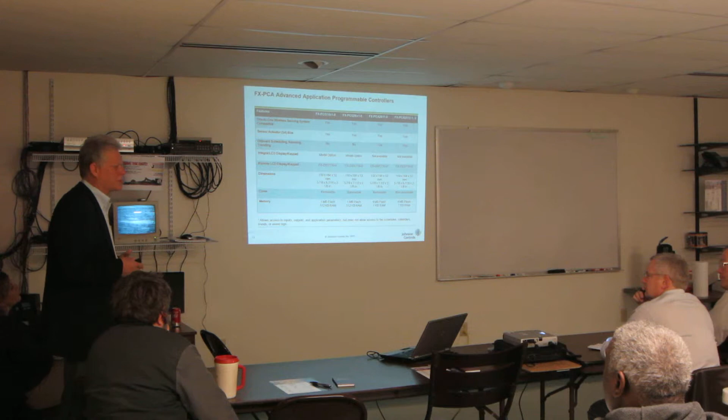The biggest thing probably too is this memory and RAM. Everything's double, the RAM and stuff. Before, when you would do an air handler routine, it would really jump up, if you did modulating heating, modulating cooling, economizer, CO2 and supply fan, return fan, and control, and lots of things. The memory would really go up fast and would slow down the controller. We've doubled that now, so it only goes up to like 0.25% of the usage, so it's really good. Don't need as much control.

VAV controller. We've changed the VAV controller. The one we have right now is still available, but the new one that we're releasing, and all this stuff I should say is released. It's already released. You can order it right now. The shipping is the 25th. And again, if you get into this connected community, you see all that stuff.

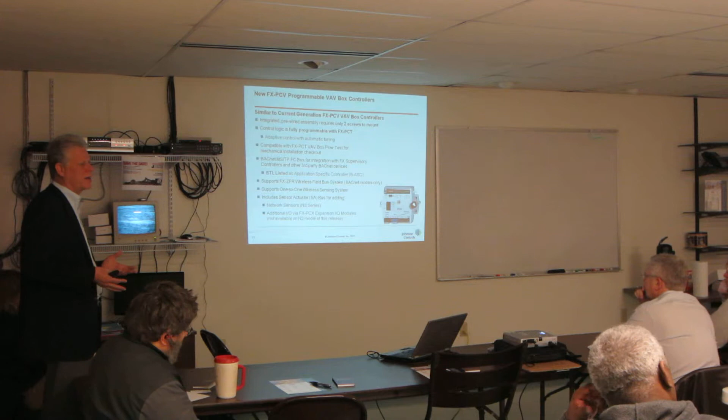So again, the new VAV controller, everything is still the same. We have our standard VAV controller. It still has the adaptive control with automatic tuning, which is a huge thing. It meets the BTL. You can still do the wireless. For any of you new guys, our controllers are BACnet, but they're also wireless. If you put a wireless flag in there, any of the controllers are wireless. Wireless to the stats and wireless up to our JACE boxes too. So you don't have to even run network wire.

What's new and improved is one of the big things. We have 3 universal inputs now. Before you would run out of AIs because we only had the 1. So now we have 3. You would have to use maybe a discharge air sensor or a CO2 sensor and use our network sensors, which would add up the cost, or you'd have to use an expansion module. A lot of specs now, with all the clean air and even school projects, have added all kinds of new inputs they want to monitor. So this takes care of that now, and the savings is almost $100 per box by adding these extra AIs.

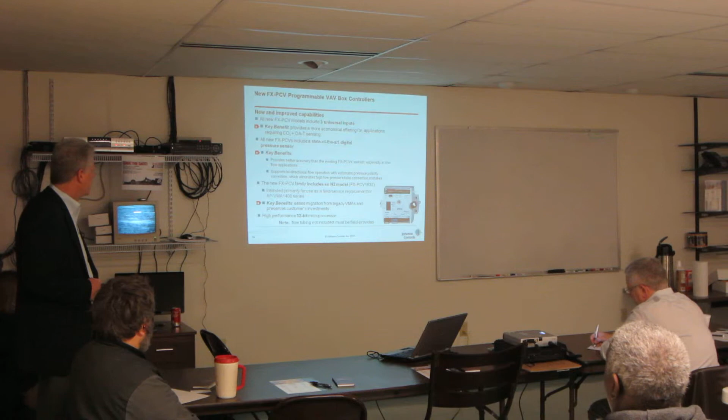The other thing, and it is available to order now, is the N2 model. For you guys not knowing what that is, it's smaller too, and I'll show you that, but everything right now that we're releasing is BACnet. Everything's new, it's all BACnet. But we had our legacy controllers that were N2. Some of our old N2 devices are discontinued, some we can't get chips for anymore, so it's very hard to get some of the parts and pieces.

So we had to come up with an answer, and now this VAV controller, you can get it in a BACnet version or our N2. The software to configure the N2 version is the PCT software, or for other ones it's the CCT software. So at least right now, there's 2 separate versions. One's an N2 and one's BACnet.

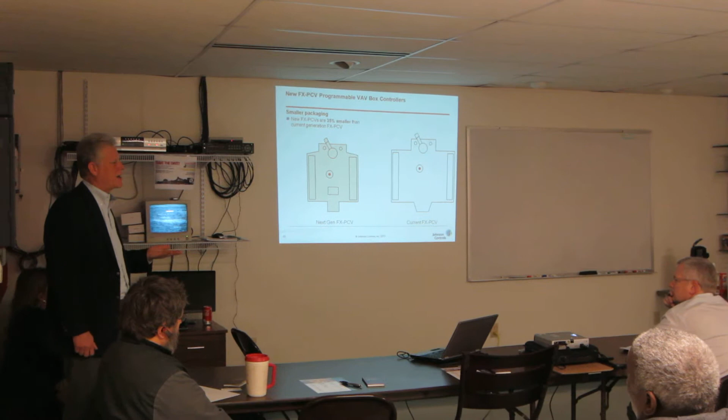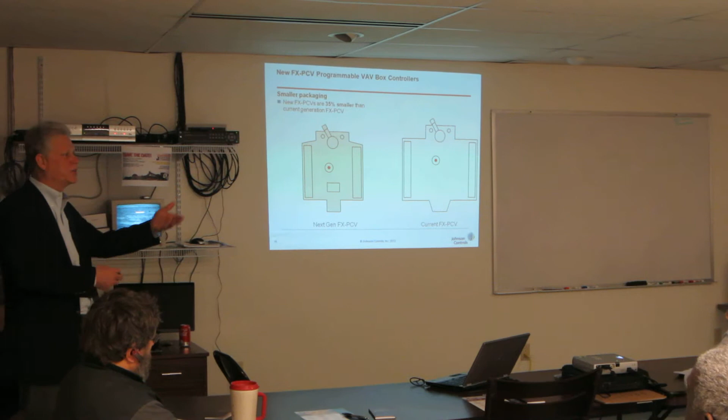Soon it'll be one model that you can get, and it'll be BACnet, and it'll be N2 that you can flash to BACnet. So you can have it on a job, say it's an old job and it's an N2, and you're just replacing some controllers, and the customer wants to go to BACnet in his building, then you can flash it and make it BACnet. But at the first release, right now, it's two separate models because we had to get it out fast. So.

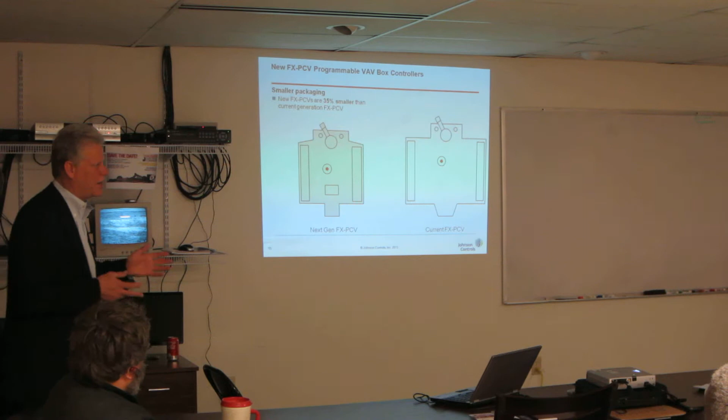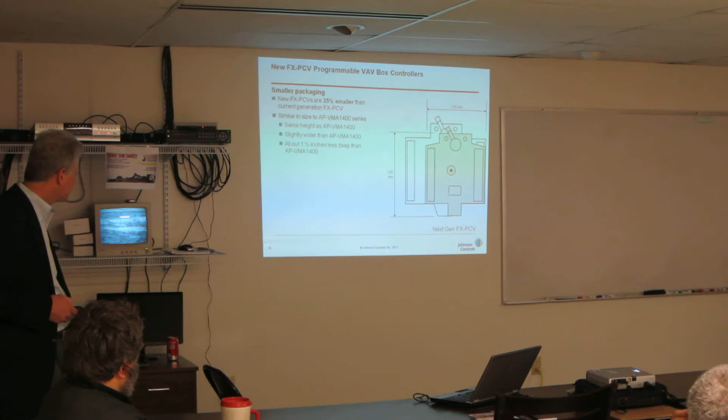The other thing that changed, it's smaller in the design. That was another thing requested by people like you, to be smaller, to fit in some of the box cabinets and stuff. And again, the biggest thing here is really probably the analog inputs.

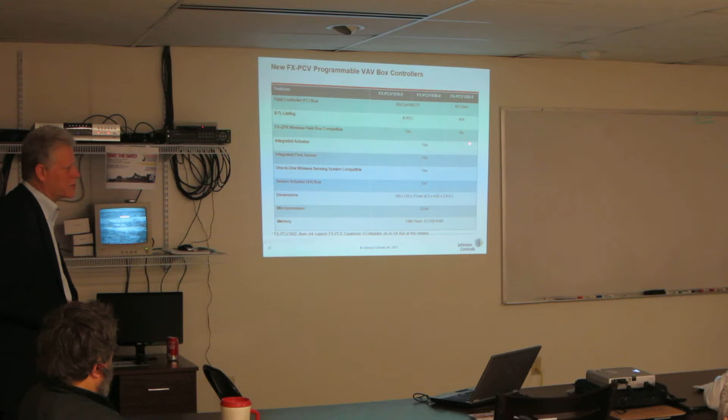The other thing is, of course, you wouldn't have the BTL listing for the N2 one. The other thing is, the N2 version does not do wireless. I don't think there's any wireless N2 out there anyway, so you really probably wouldn't need it on the job. Still the integrated actuator, can still do sensing 1-to-1. So all those things are the same.

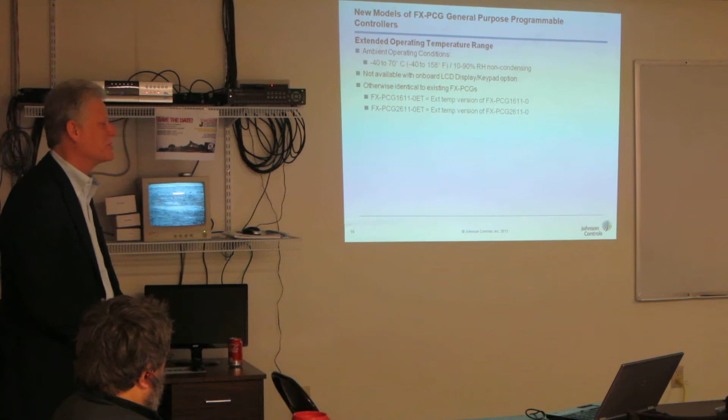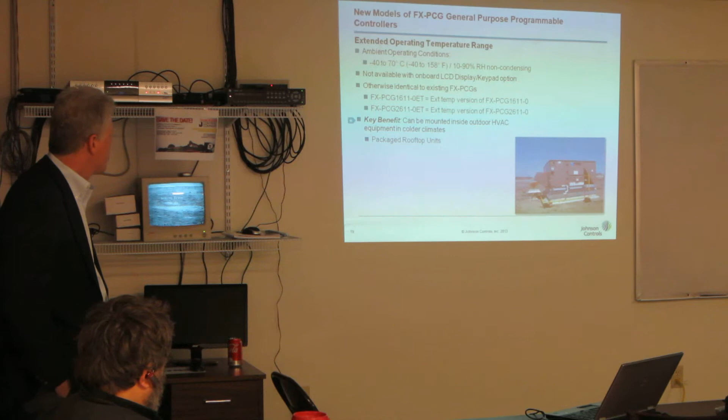The other new model we have of the PCGs is extended operating temperature. Before, we did not have a low temp model, and now we do. I know a lot of guys have installed them out there in rooftops and different applications, but now we actually have a version that is a low temp model too. And again, the biggest thing there is now you can put them in packaged rooftops.

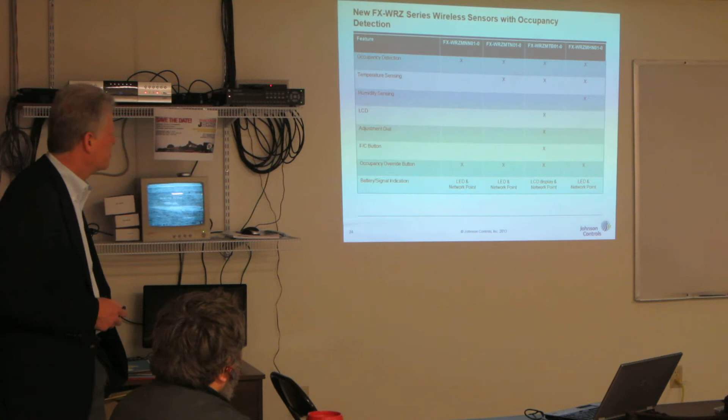Instead of having a separate CO2 sensor, a separate temperature sensor, or maybe a separate humidity sensor, you can do a lot of it now in one stat. And then also on the wireless side too, which is the occupancy, LCD, temperature, and the occupancy detection. Here's a few more temperature sensors too. Oh, here's another good one.

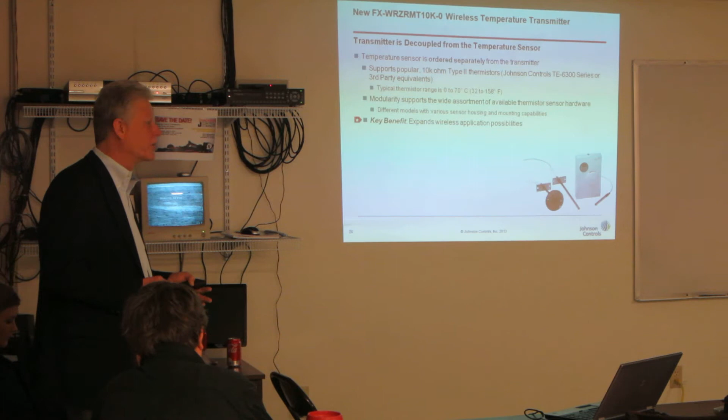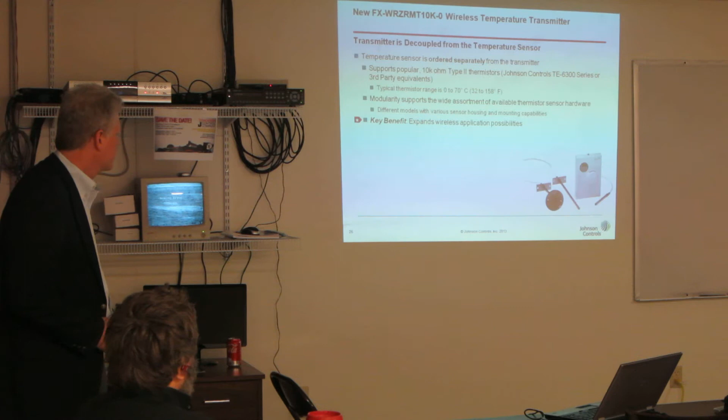Now the controllers can support 10K ohm. Why, you ask, is because Trane and a lot of different other brands use 10K ohm. A lot of third-party sensors use 10K ohm. So if you're changing out an existing building, you can use existing sensors, from their discharge, space sensors, stuff like that. That was one of the big things that they wanted added also. Let's see here. So any questions on the controllers?

I know I kind of went quick through them, but anybody that's new that wants to know more about the controllers, I have a whole other slide deck, or we can stay afterwards for a little bit and go over some of the new controllers. It's fine by me too.

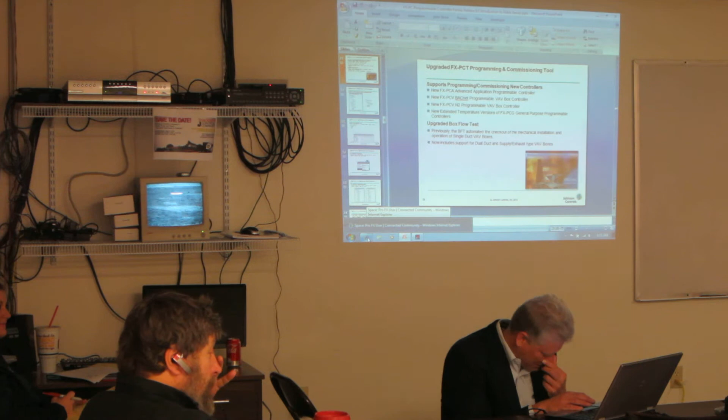Pricing on the PCA, roughly, relatively, like double, 1.5 times a PCG, what? The list pricing was on the community. Is it? Yeah, that's fine. No, we'll look real quick though. Yeah, I had the same question. It's not double, but it's a little more. Oh, I saved it into my thing. I don't know if I did.

Lotus. Wow. Yeah, can you believe that? Johnson Controls uses Lotus Notes. Wow. They own Lotus? No. Oh, they don't? I thought maybe they own Lotus. No, in fact Lotus was out of business. In fact, we are going to be changing. Can you believe that? What do you mean changing? To Microsoft. Can you imagine the change of 150,000 employees? Wouldn't that be fun? Why don't they do something